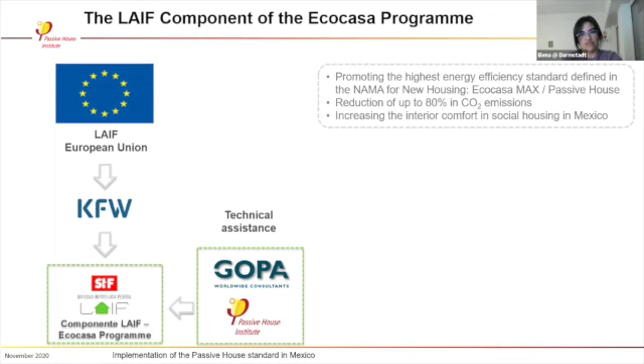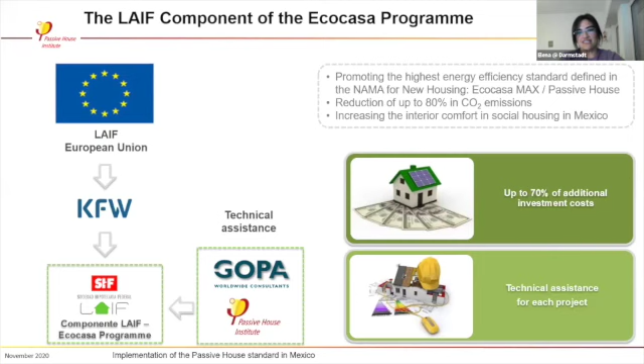The whole program is basically incentivizing some of the houses, focusing on the highest energy efficiency level possible, which is passive house, in order to achieve up to 80% reductions in CO2 emissions. Through the program, two things were provided: first, most of the resources were allocated to have 70% subsidy on the additional investment costs related to the energy efficiency measures; second, technical assistance so that each project would achieve the passive house standard.

This was a huge team effort, starting with the people at Sociedad Hipotecaria Federal, also GOPA, who worked directly in Mexico with them to get all the developers, the designing teams from each company building the projects, and the local advisors like Marisa who worked very closely with these companies so the projects would be realized.

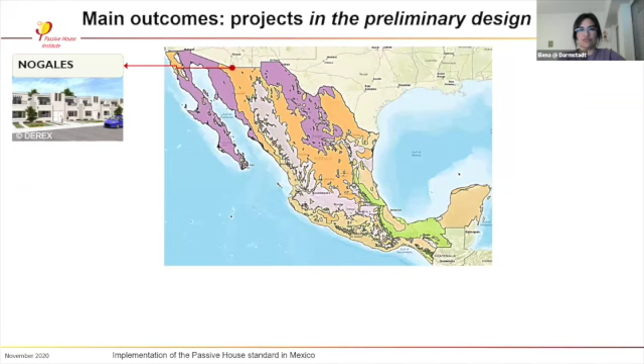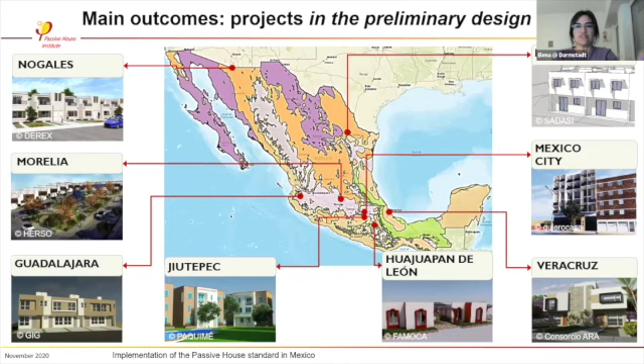We were quite lucky to study a lot of different typologies and projects through the entire country, so there's a variety of climate conditions we were able to study. From these projects, several were further developed into more detailed planning so we could specify the components. Finally, we got 30 pilots that were built in 4 different cities.

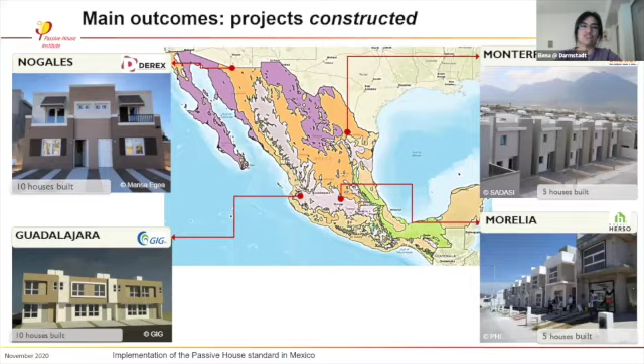I'm not going to talk about all the different technical parts because I think you already know a lot about how passive house is done, but I'll mention 2 projects in very different climate conditions so you get an idea of how passive house can look.

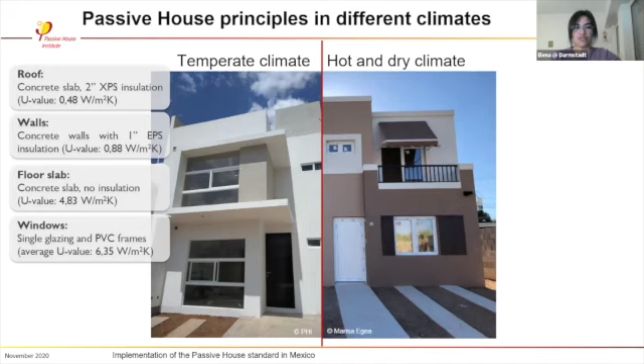On one side we have a very temperate climate, more or less like Mexico City. Here you can have a passive house with 1 or 2 inches of insulation in the thermal envelope. We didn't even have to add insulation on the floor slab, and as you may have guessed, we can even do with single glazing. We just provided framing of better quality to achieve the air tightness requirement.

Because of this, because there's so little heating and cooling demand, ventilation with heat recovery was not worth the investment. So we only have an extractor system to guarantee good air quality at all times.

We didn't have to install any active cooling. All we did was put a small electric heater for the cold days that happen not very often in this climate.

On the other hand, we were also able to develop the second project, which was basically in the desert. For this one we had a bit more insulation, around 5 inches, and then 4 in the floor slab. This project actually used certified components imported from Spain, if I remember correctly, and we needed triple glazing.

The reason for this was that because of the timeline of the project, at the moment when they were ready to construct, we had not been able to get the ventilation units with heat recovery for Mexico. So what we did is we changed the design so they could do with an extract air system, and then we just compensated the heat gains in this case through better components.

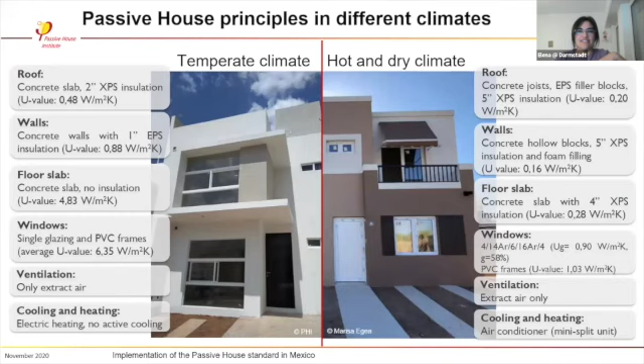So that's basically what we did for all the different projects. And now I'm going to let Marisa show you a lot more about how it was to then turn this into the actual projects in the different cities.

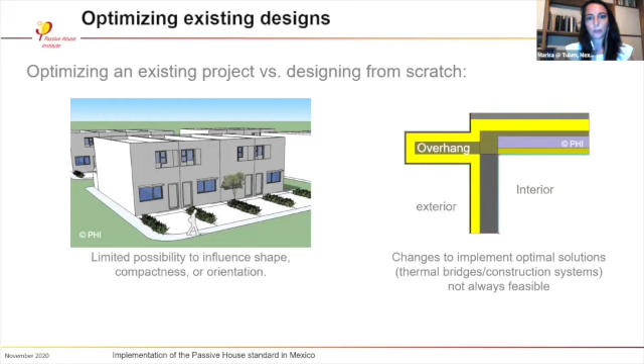So Elena, can you help me with the next one, please? Thank you. And we had a very long process of planning, which was really interesting. We had to make all these details together with the companies, and it was really fun to witness once they had the details.

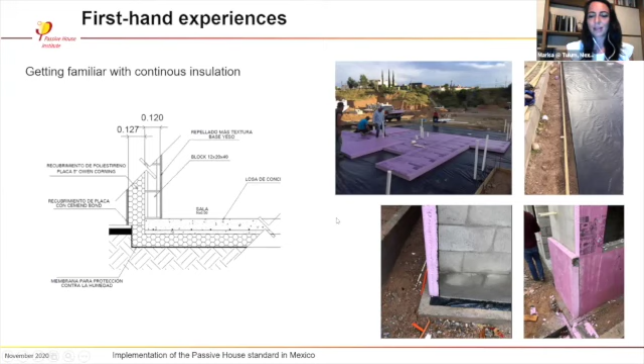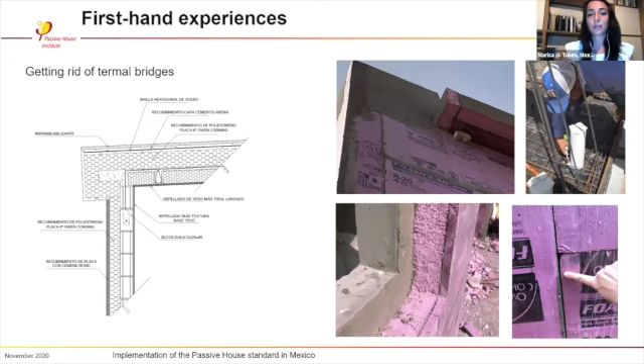Again, we were trying to get rid of the thermal bridges. During the planning, we did all the details and so on, but during construction we of course ran into gaps between the insulation panels, and of course the penetration of all the electricity, plumbing, and ventilation. We had to solve it from inside with the materials we could afford at that moment. Next, please.

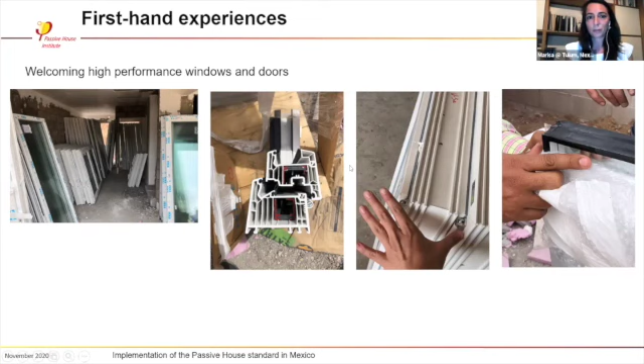This involved, again, installing the windows in the right place, because we knew that we had to work in terms of air tightness before the planning stage. But once the windows arrived, we didn't realize that the opening of the windows was going to be a problem, so we were trying to figure out new ways to solve those issues on site.

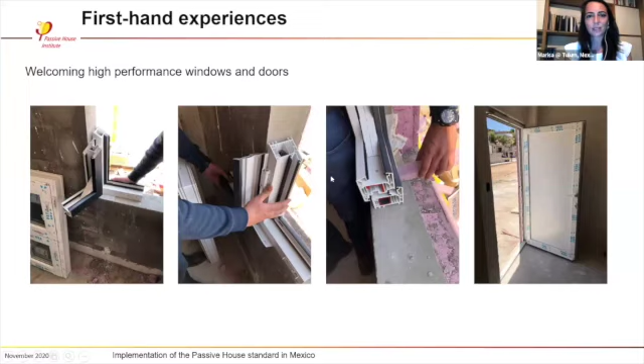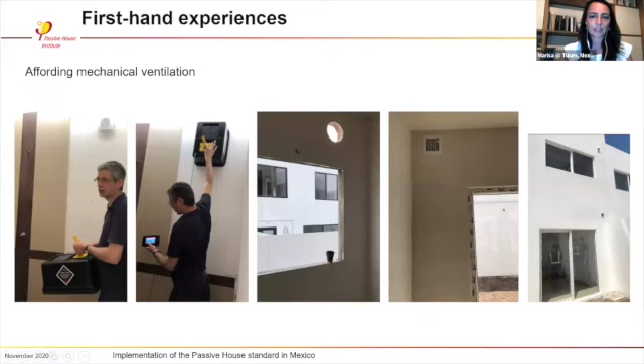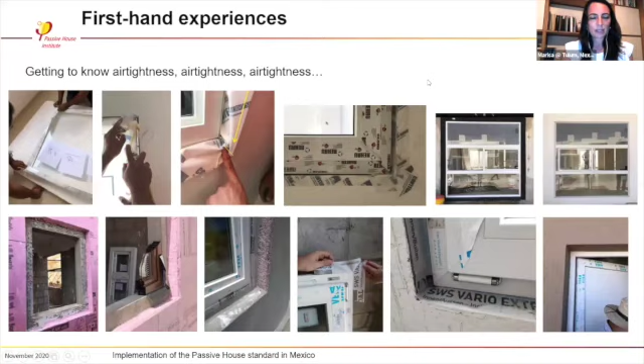Of course, all the installations were also a big issue, because in Mexico we had to buy samples of the electrical system and then send them to Germany, to the manufacturer of the tapes, to show them what our issue was going to be. They manufactured by hand these shapes that allowed us to prepare the material. So they sent back to Mexico some of the samples, and the construction team would know how to work with the tapes for the electric system, plumbing, water, and ventilation system.

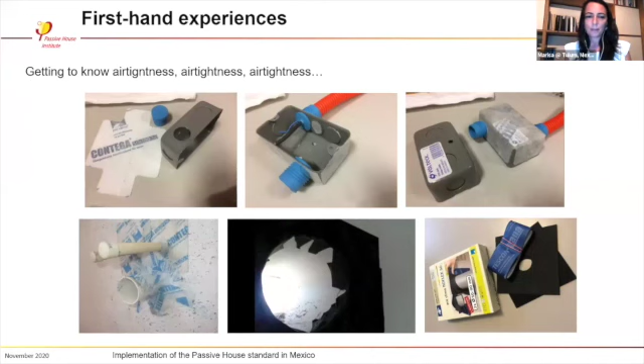After that, it got to the final moment, and we were having fun finally with the blower door test. It was really exciting to see how the house that was planned with such detail passed the test really easily. We didn't have to do anything with that house. But it was fun to see the tiny little gaps and how it worked, and it was amazing for everyone on the construction site to be present at the performance of that test.

My favorite part of the blower door test was the technique used to seal all the different pipes with actual party balloons. It was actually great and a lot of fun to be there to see how they interpreted the requirements. Yes, I agree.

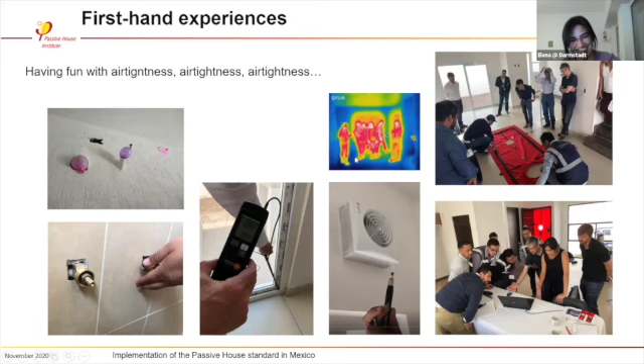As I said, the training, the teams, and the active role of the design team, local advisors, and the manufacturers gave results. You can see the results on the right of one of the houses, and it was pretty amazing. We didn't have to do anything at all with that house after that blower door test. It was supposed to be like the preliminary test, but it worked perfectly.

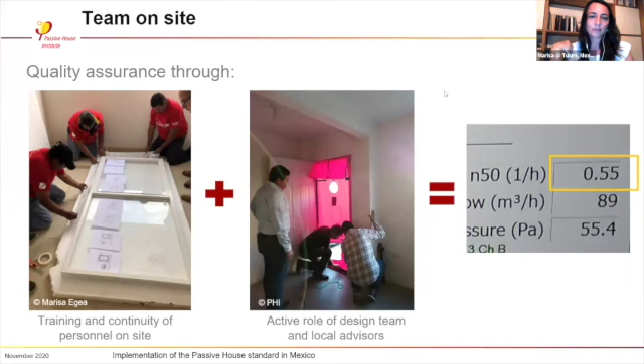The lessons learned through this project are that you need intensive communication between all parties involved, and this happened at this project with all the stakeholders behind the construction site, and of course, at the construction site itself. So information was going back and forward all the time, and it was really intense, and it paid off.

As this picture shows, some of the companies were really smart because they built a pilot unit first. They were going to build 10 houses, but instead of building them all at the same time, they decided to build a pair of houses first and apply the lessons learned to the second pair, then to the third pair. It was great because the last pair of houses was built really fast with no obstacles in the way.

And of course, it all ended in upward learning at all scales. For everyone involved, it was a great experience.

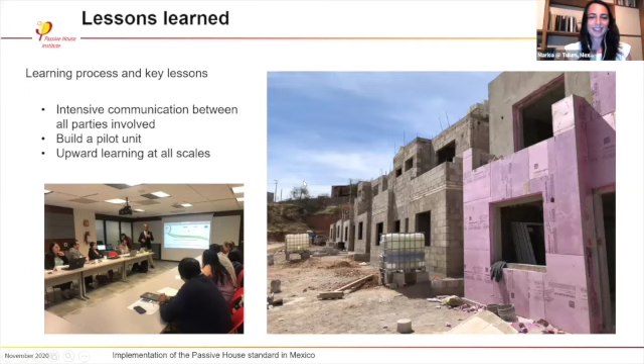So Elena, I get back to you. Thanks for helping me with the slides. No worries.

As you may have already guessed, one of the key things here was the components. One of the things we had to work a lot on, and which I hope is valuable not only for this project but also in the future, is that we were able to set up a chain so that components not yet produced in Mexico are now available.

The different manufacturers that were interested in working with us were also able to form relationships with local companies, either working as distributors, or in the case of ventilation systems, also part of the teams that would help with the design of the whole ventilation system for the houses, and then also provide post-sale services.

This is definitely a factor that has to be taken into account for these relatively uncommon projects, because importing still brings a lot of complications to the whole construction process in terms of schedules and many other things.

I don't know if you've talked to any of my colleagues, but this is why we also insist a lot on local components and having components manufactured in the places where the houses are built, because this not only allows for better prices but also makes the whole process much, much easier.

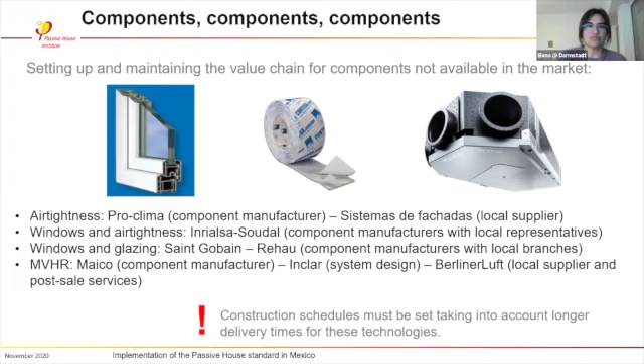I'm not going to dive into the cost of the project, but what I want to show you in this graph are three things. For each of the projects you see two graphs: the first, BAU, is business as usual, and the second is the passive house. Green is for electricity costs, blue is for gas costs, since in Mexico we use gas for cooking and heating water.

And red are the additional investment costs. So you see three projects: the first two and then the very last one overall have very low costs. Those are the projects located in very mild climates, so the milder the climate, the easier it is to achieve passive house. The ones in the middle are much, much higher, those are the climates with more requirements, the very hot climates, and especially very hot and humid climates, where you would need significant investments at the beginning.

So obviously for the projects where the climates are very mild, even though the initial investment costs are lower, the potential savings are also lower. So in those cases, it was actually harder to achieve what we consider cost efficiency through passive house.

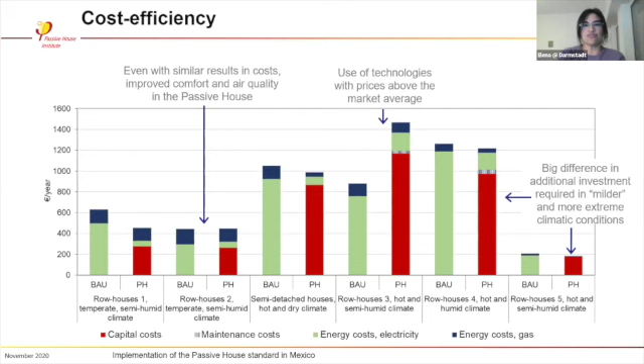And then one thing we still need to consider is, even if the project shows throughout the whole life cycle that passive house is definitely a better option in terms of savings, this is still social housing.

So this does not necessarily mean it's yet affordable for the user, and this is where the role of banks, financing, and incentives comes into play, because we need to make sure the families buying these houses are able to pay the loan, since most houses in Mexico are bought through loans. This is something that needs to be considered, not only for this project, but for any other project that wants to incentivize more energy efficient homes.

And an element that definitely comes into play is the teams you're working with. If they are already familiar with, or working in companies that foster innovation, it will be easier for these teams to get into the process of much more detailed planning that passive house requires.

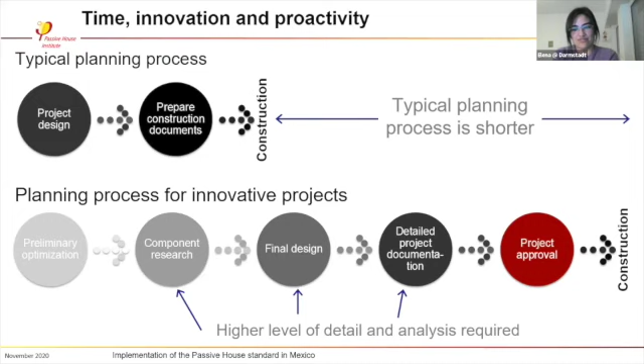In Mexico, social housing already has the prototypes, they don't have to do anything with them. They just put them into a site and construct them, in hundreds and thousands. So there's no planning process, and we were asking them to go back into the design, not only redesign the house or prototype, but also look into the details and see how that would work, because that was actually very important, as Marisa showed, to be able to achieve what we wanted for passive house.

So my last slide is called conclusion, but it's mostly food for thought. I think through these projects we were able to show that passive house is technically possible in Mexico. And as you already heard, these are not the first passive houses in Mexico.

Marisa worked on the first house in Mexico, but we also have to keep in mind that it requires more resources, not only in terms of the technologies, but also in the time teams need for additional planning and to be able to construct these houses. So teams and how they are involved in projects are key, and communicating throughout the whole process, from the beginning of planning until the house is ready, is really, really important.

Another thing that Marisa and I started to discuss is that we, as passive house people, see the benefits of these houses not only in terms of the environment, but also in terms of how they improve people's quality of life. But we wonder whether one of the challenges is being able to communicate these benefits to the people who would ultimately buy these houses, and how much we can still contribute to market awareness, so that this isn't only done through projects with subsidies, but becomes part of the norm in Mexico, and not only in Mexico, but in other countries.